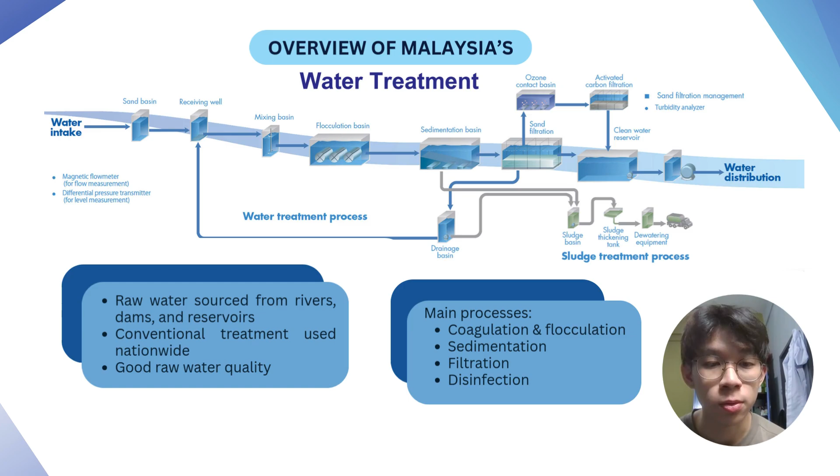Before we begin, it is important to understand the water treatment process in Malaysia. Most drinking water is sourced from rivers and treated using conventional processes such as coagulation and flocculation, sedimentation, filtration and disinfection. Because this system relies on good raw water quality, sudden increase in turbidity can disrupt the treatment operations.

This case study focuses on the Johor River pollution incident that occurred between October and November 2025. It is described as the worst pollution incident affecting Johor's water supply. Sungai Johor is the main raw water source for several districts in Johor, including Johor Bahru, Kota Tinggi, Kulai and Pontian.

The pollution was caused by the failure of a sediment pond at the sand mining site upstream, which released a large amount of suspended solids into the river. As a result, water turbidity increased drastically, making the raw water unsuitable for treatment. This led to widespread water supply disruption.

This slide presents the key evidence from the Johor River pollution incident. Under normal conditions, raw water turbidity is around 400 NTU. During the incident, turbidity spiked to approximately 37,400 NTU, which is nearly 100 times higher than normal levels. At this concentration, water treatment plants were unable to operate safely and had to suspend operations.

As shown on the map on the left, the resulting water supply disruption affected up to 800,000 residents across several districts, including Johor Bahru, Kota Tinggi, Kulai and Pontian. Additional impacts in areas such as Senai, Skudai, Seelong, Felda Linggiu, Petri Jaya and Lima Kedai.

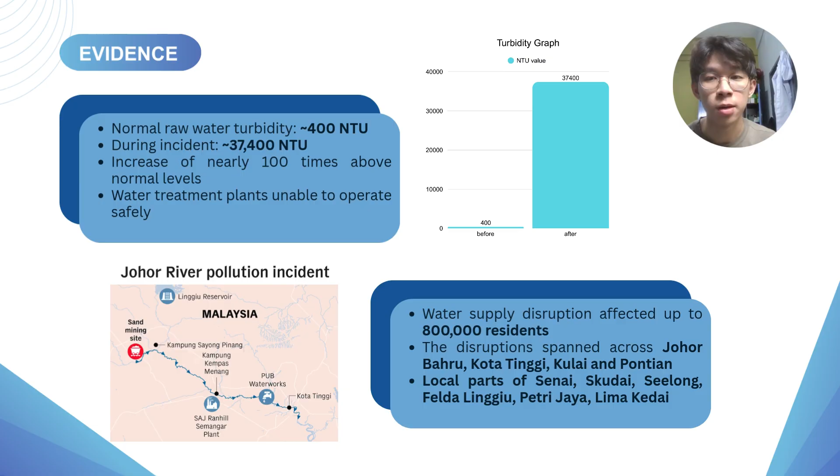This water crisis in Johor began at a sand mining site in Kota Tinggi, where a sand washing pond burst due to soil movement. According to the article, the structure failed when the surrounding soil became unstable, causing the pond to collapse unexpectedly. When the pond burst, it released a large volume of silt, sediment and muddy water directly into Sungai Johor. This was not a small leak but a sudden discharge that flowed straight into the river system, which is a major raw water source in Johor.

As a result, the turbidity level of the Johor River increased sharply. Turbidity refers to how cloudy the water is, and in this case, the amount of suspended particles became extremely high. The article explained that when turbidity reaches such a level, water treatment processes are no longer effective or safe to operate.

Because of this contamination, several water treatment plants along the Johor River were forced to shut down immediately. These shutdowns were a preventive measure to avoid damage to treatment equipment and to ensure the unsafe water was not supplied to the public. Therefore, the failure at the sand mining site directly disrupted the water treatment system downstream.

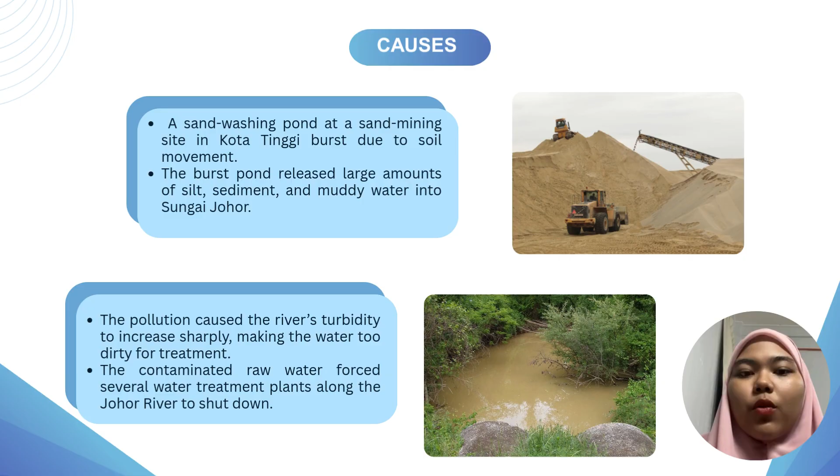Next, for the impact, the water pollution incident in Johor had severe widespread impact on both the population and local business. Nearly 800,000 people were directly affected by the sudden water cut. Multiple districts including Johor Bahru, Kota Tinggi, Pontian, Kulai and Iskandar Puteri lost their clean water supply, disrupting daily life for residents across this area.

This immediate shortage of clean water led to significant challenges for households. People struggled to perform essential daily activities such as cooking, cleaning and maintaining hygiene, all of which rely on a steady water supply. For many, this lack of clean running water also posed a public health concern, as alternative water sources were often unsafe.

Additionally, businesses that rely heavily on water for their operations suffered significant financial loss. From manufacturing plants to restaurants, businesses were forced to halt production, resulting in loss of income and operational setbacks. For industries where water is a key component, such as food production or services that require water for sanitation, the economic toll was severe.

The disruption was not just an inconvenience, it led to long delays in restoring water supply. Water treatment plants need extra time to safely restart their operation. This delay left communities in a state of uncertainty for several days, which only added to the frustration and anxiety of affected residents and businesses.

As a result, the sand mining company responsible for the sediment pond failure is now facing official investigation and potential legal action. This highlights the legal and environmental consequences of neglecting proper sediment control and the importance of holding companies accountable for their actions, especially when they result in such widespread destruction.

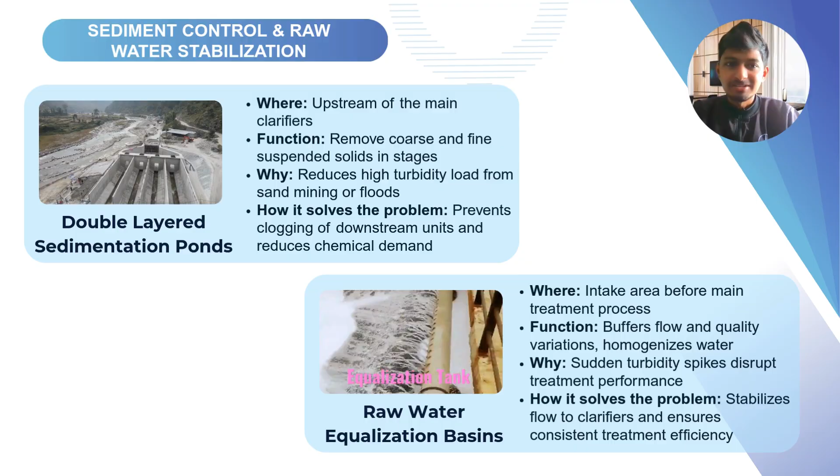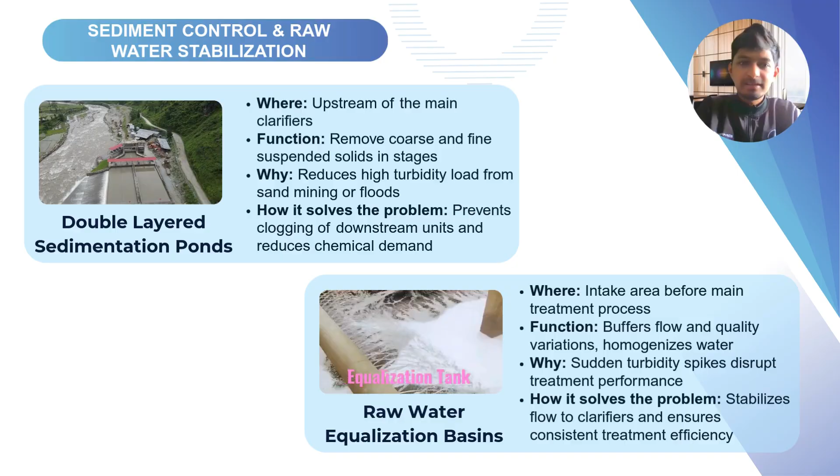Next, I will explain about the solution. To manage high turbidity and sedimentation pollution, water treatment plants must improve sediment control and raw water stabilization. These reduce the sediment load caused by sand mining activities and flood events.

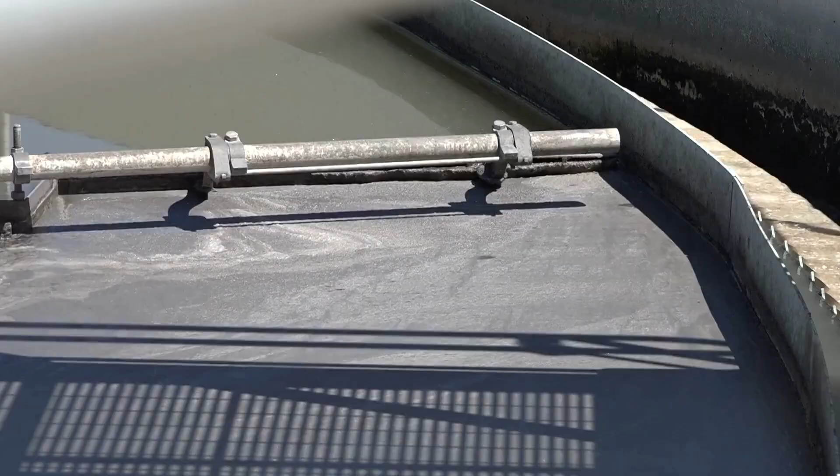Next, raw water equalization basins are located at the intake to buffer sudden changes in flow and water quality. By stabilizing turbidity levels before treatment, these systems protect downstream units and improve overall process efficiency.

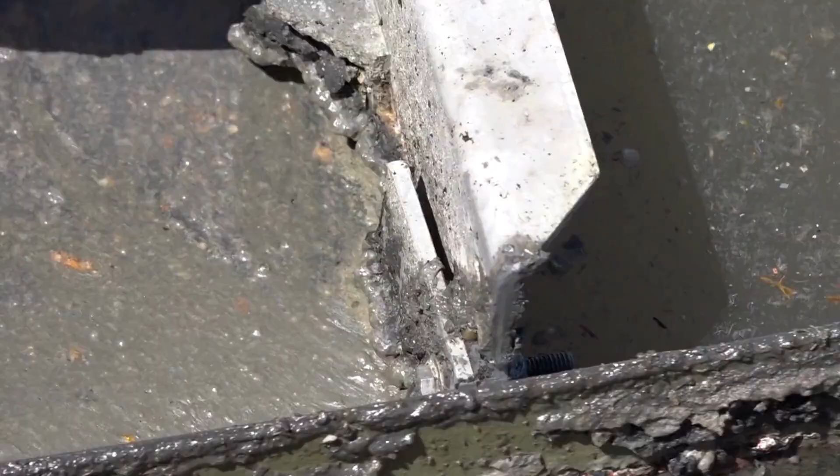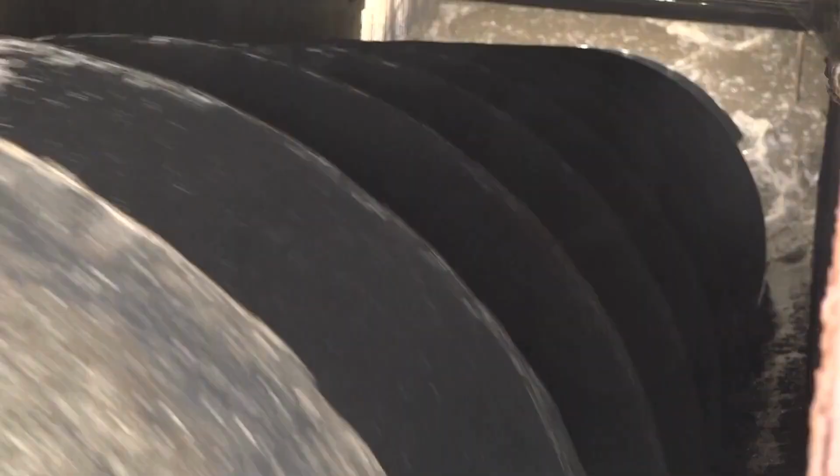And next, these reduce the sediment load caused by sand mining activities and flood events. High-rate clarifiers further ensure settling performance and allow treatment plants to operate efficiently during extreme turbidity events exceeding 30,000 NTU. Smart monitoring and emergency response systems are established to prevent plant failure during pollution

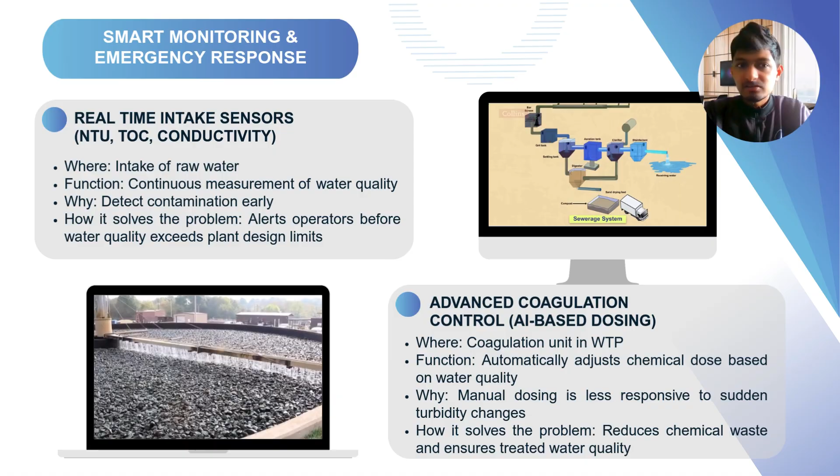incidents. Real-time intake sensors continuously measure turbidity, total organic carbon and conductivity, allowing early detection of contamination. And advanced coagulation control using AI-based dosing automatically adjusts the chemical dosage based on raw water quality, improving treatment efficiency and reducing chemical waste.

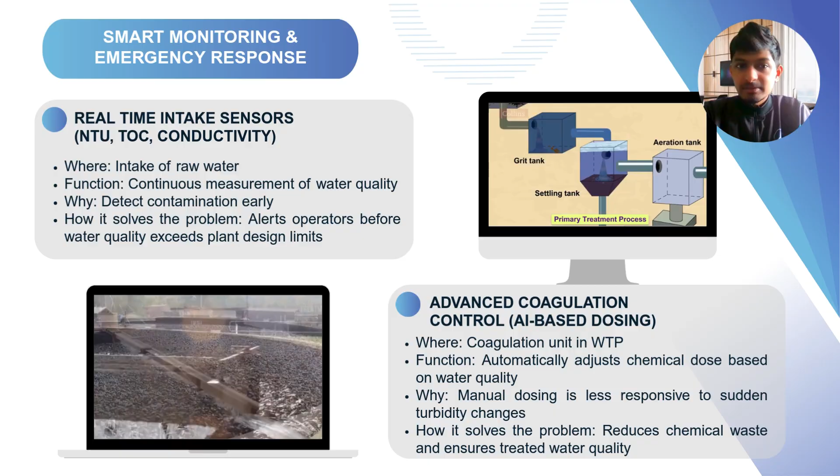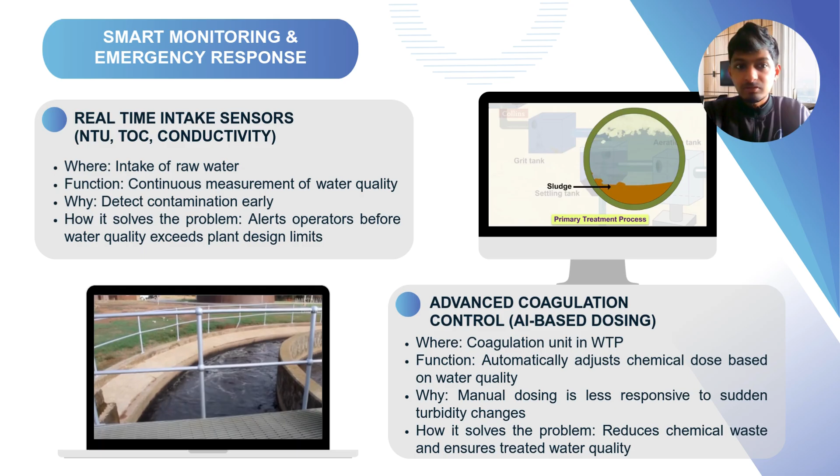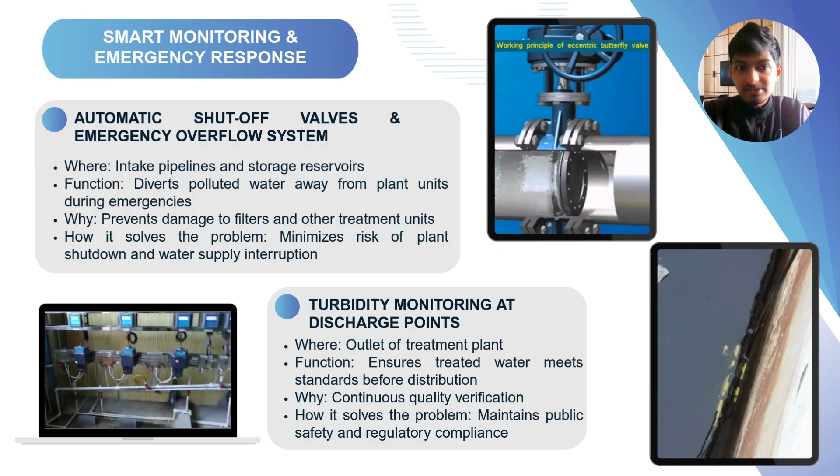Automatic shut-off valves and emergency overflow systems prevent highly polluted water from entering the sensitive treatment units. In addition, turbidity monitoring at discharge points ensures the treated water consistently meets regulation standards and protects public health.

So this is the flowchart of the cause of Johor River water pollution before the solution. Uncontrolled sand mining activity upstream led to the failure of the sand washing pond. This released a large amount of sediment into the Johor River, causing extreme turbidity above 30,000 NTU. This raw water quality exceeds the water treatment plant's design limits, overloading sedimentation and filtration units.

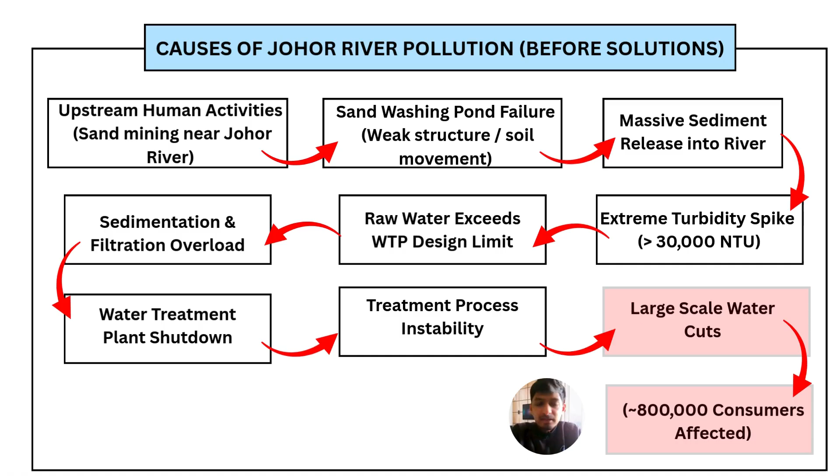As a result, the water treatment process becomes unstable, forcing plant shutdown and causing large-scale water cuts affecting about 800,000 customers. So next, after the engineering solution is implemented, this is the flowchart. With the engineering solution in place, industrial wastewater is treated and monitored before being

discharged into the river. River and intake sensors detect water quality changes early and trigger AI-based coagulation control and flow stabilization. Equalization basins, sedimentation ponds, and high-rate clarifiers maintain stable treatment performance. This ensures continuous safe water supply without plant shutdown and major water disruption.

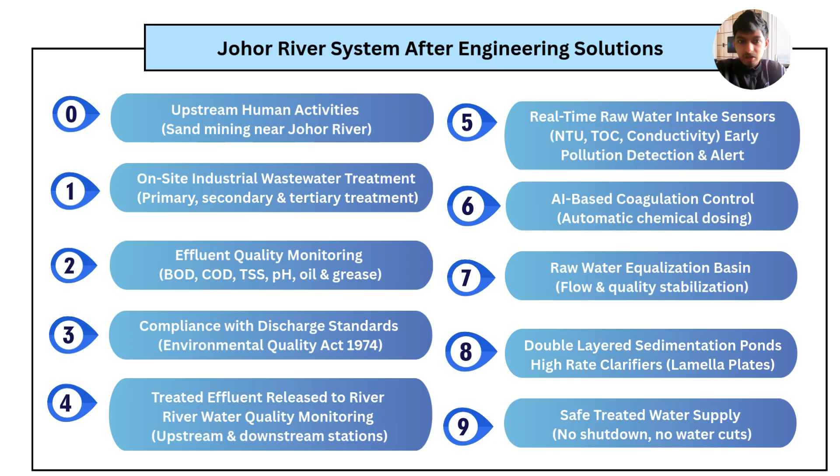downstream. Okay. So next is the call to action for engineers, industry and regulators. Regulators must strengthen enforcement of environmental regulations, invest in advanced monitoring technologies and water treatment plant upgrades. Industry and farmers are responsible for treating effluents properly and reducing chemical and sediment runoff into the river.

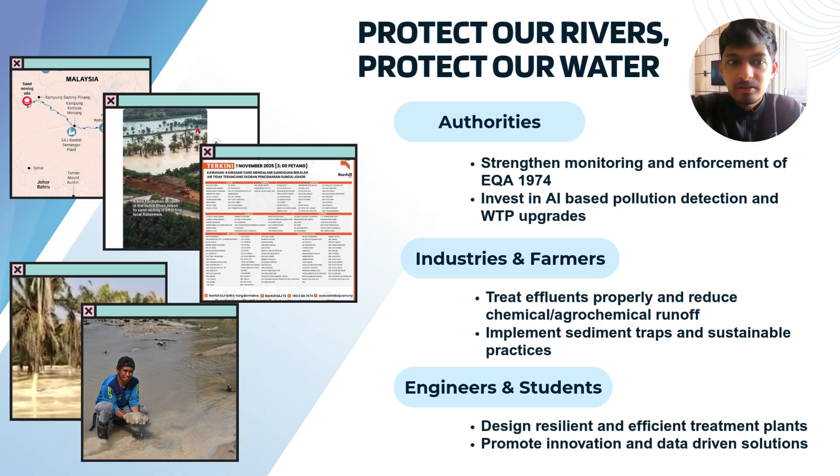As chemical engineers and future professionals, we have the responsibility to design treatment systems, optimize chemical usage and apply innovative solutions to protect our water resources. So clean water is not optional, it is our responsibility.